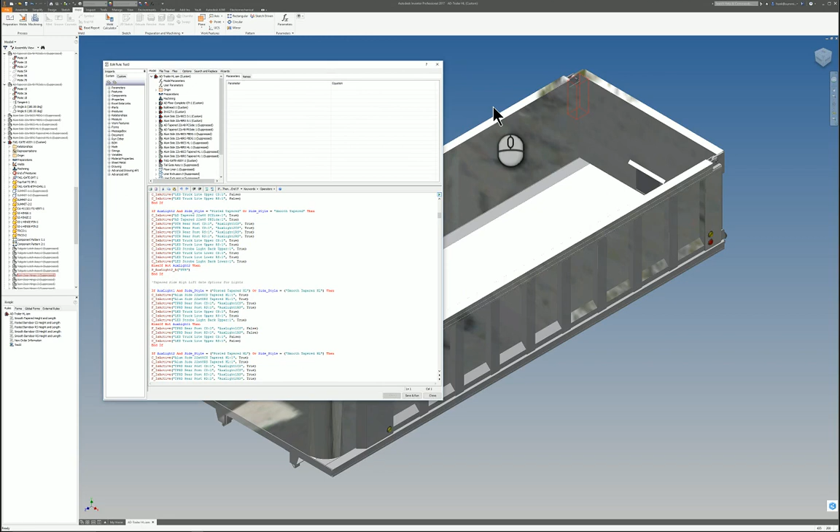Here we go. I've been fiddle farting around with this project for weeks now, and finally got some audio on these tracks, so there you go.

I've been getting some help from a friend of mine who I never met from Eastern Europe someplace. His name is Mike. Hey Mike, thanks for all the help. Can't tell you how much it means to me to have help with this.

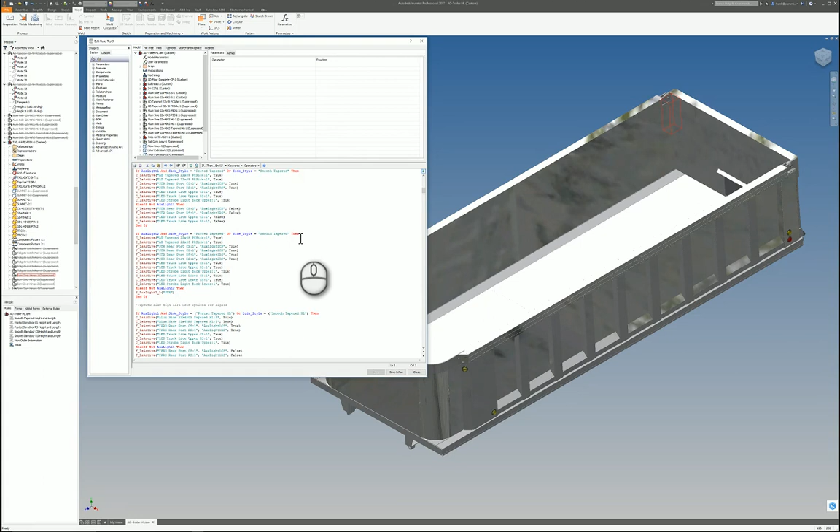Right now I'm fighting some issues with the rear lights, for whatever reason. I have them turned on in the sub-assemblies on the left, or the curbside and the roadside models. So, oh, and also the double knuckle chute, they call it a double knuckle because of the two knuckles, obviously.

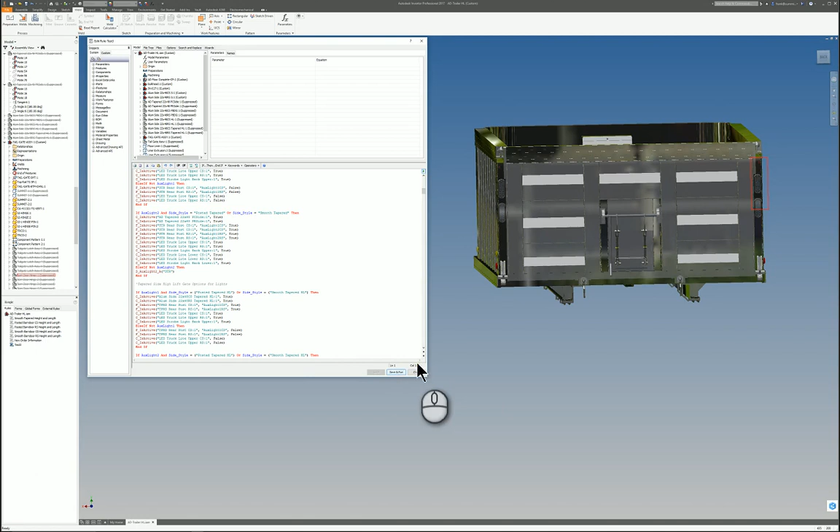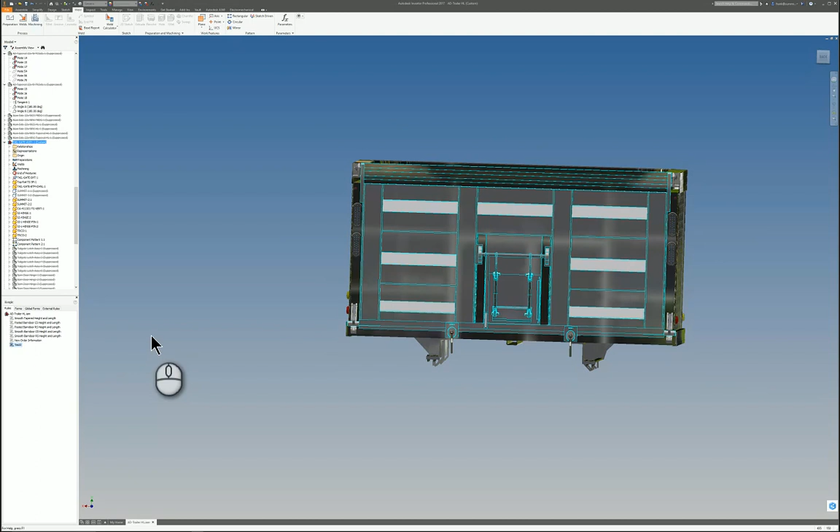So let's just save this, and this will fire up. Come on. There we go. Alright, and my form went away, so let's see if we can get it back. Didn't pop on another screen. Alright, let's do it this way. There we go. Save and run. Alright, got my form back.

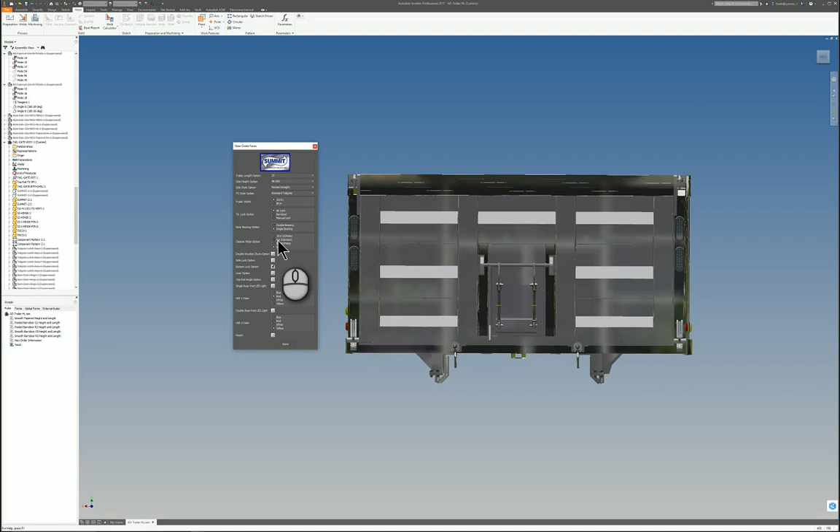And as you can see, clicking on the double knuckle chute does nothing. Everything else seems to work pretty good, with the exception of the lock options on the floor assembly. That's some code that needs to be straightened out. And the cleaner plate option is not working properly.

It worked when I had 5,000 lines of code, but with the pared down version I got from Mike, well, let's just say we're working on it for now. And I added blue to the mix just for the fun of it. And I get an error when I click on this. It's looking for the back of the lights. The lights are an assembly. And the back is the part that actually changes color.

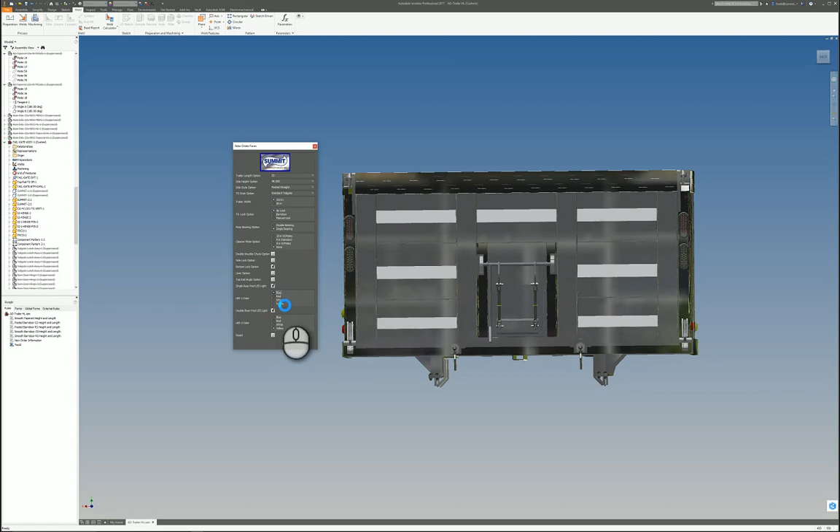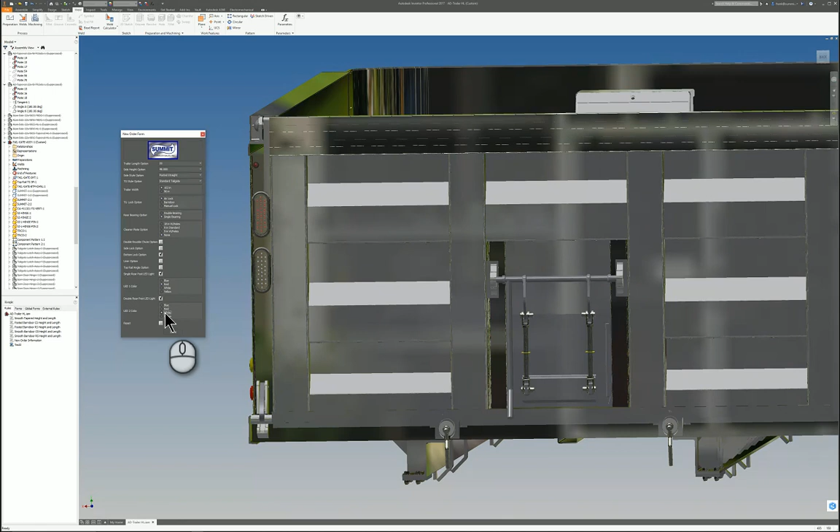So you can change them to blue, yellow. I don't know if you can see it on here real good. Let's get in on it a little bit. White. It's kind of hard to tell. So stock, if there is a dual light configuration, the tops are usually red, and then the bottoms are yellow or white. So the bottoms are either turn signals or backup lights or both. LEDs, you can have multiple colors in one light fixture.

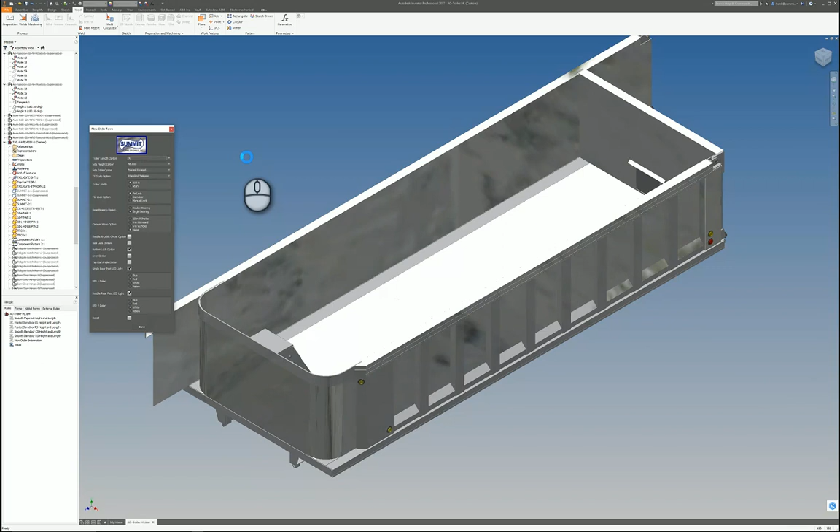So anyhow, let's just play with some of the other options that do work for now. Let's get that up there. Alright, now we can change the length. The length works great. I'm not going to go through all of them. It takes long, and these videos get hideously long when you try and go through all the options to make sure everything works. I've done that off video, and all the lengths work, all the heights work for the side heights. Let's just change it to 60 as a popular side height.

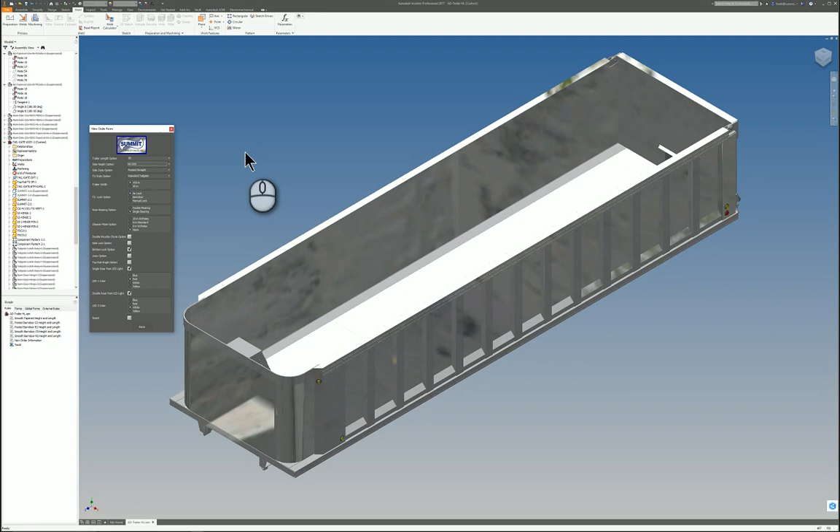There's all kinds of options with this, and the goal is to get this thing so it works with all the options, and then push it up to one of the Autodesk hosted sites. I think it's Configurator 360, and the model goes up there, the forms go up there, and your customers can order their configuration. Obviously from your form here they can select all the options they want.

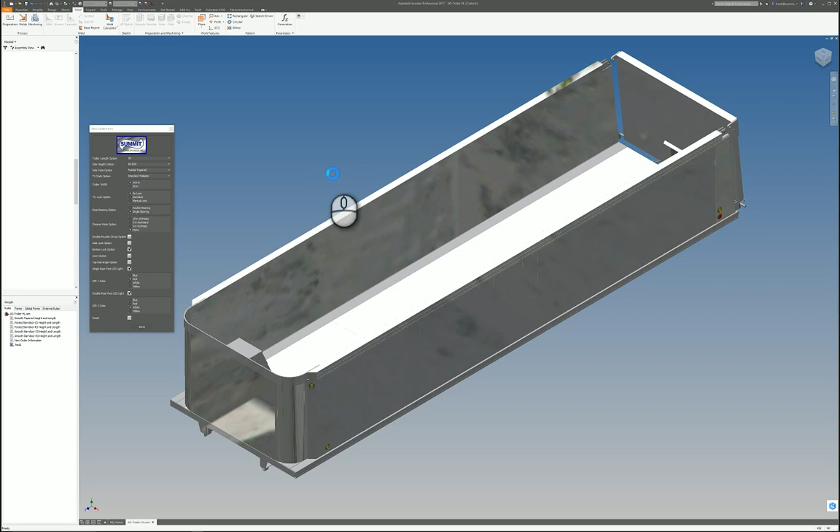And then let's change the side configuration. Let's go with posted tapered. And for whatever reason, this silly thing goes through a lot of the side options that I've gotten back. And to be fair to Mike, I just gave him the model files for all of this stuff yesterday, and so he hasn't had time to see what's actually going on. He's only been looking at the raw code and tweaking it from there, so I'm amazed at how much stuff works here.

Now you can see some of the constraints are off. I need to tweak some of the constraints on the gates, but I'll show you. This is a tapered side. Oh, come on. Okay, there's the tapered side, and obviously I need to get after the constraints on the tailgate, which that's not a big deal at this point.

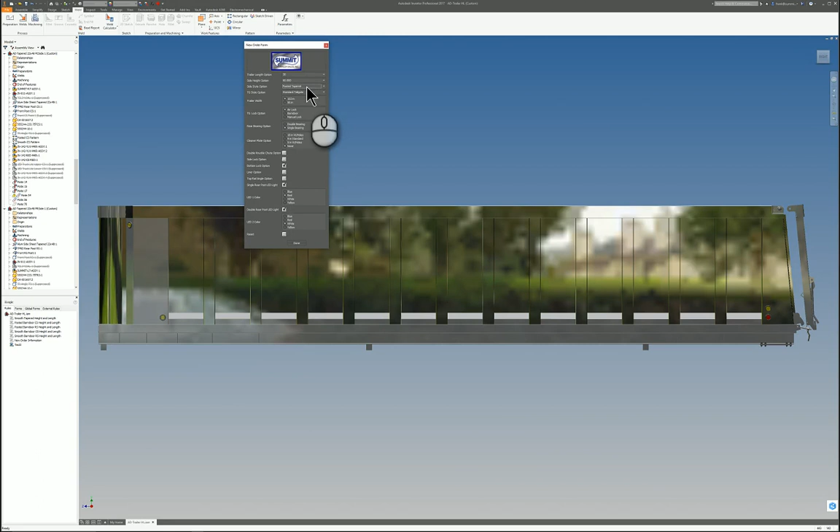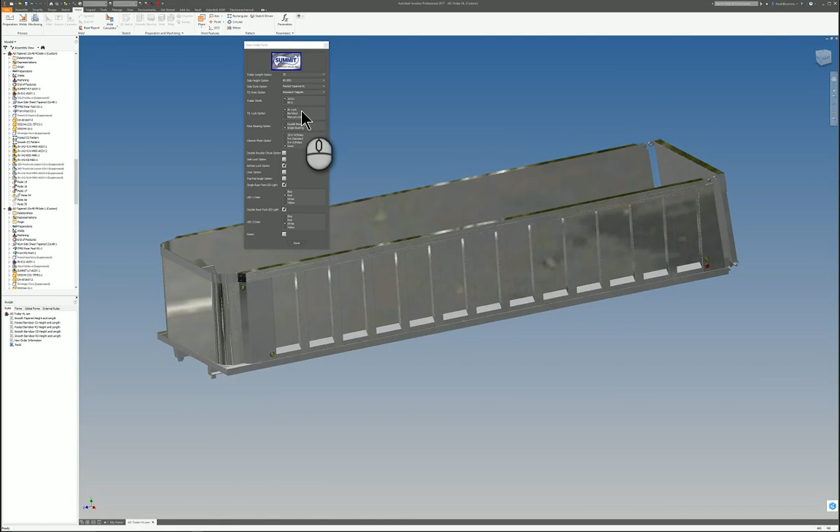Let's do something. Let's go with posted. No, I don't want to do that. Oh, it's going to give me an error on that one, so we're not going to do that one. I think I may have just junked the code. Alright, well, anyhow, you guys kind of get the idea what's going on here.

Still working on the reset. When I had the 5,000 plus lines of code version of this rule that's driving this whole model, the reset worked great.

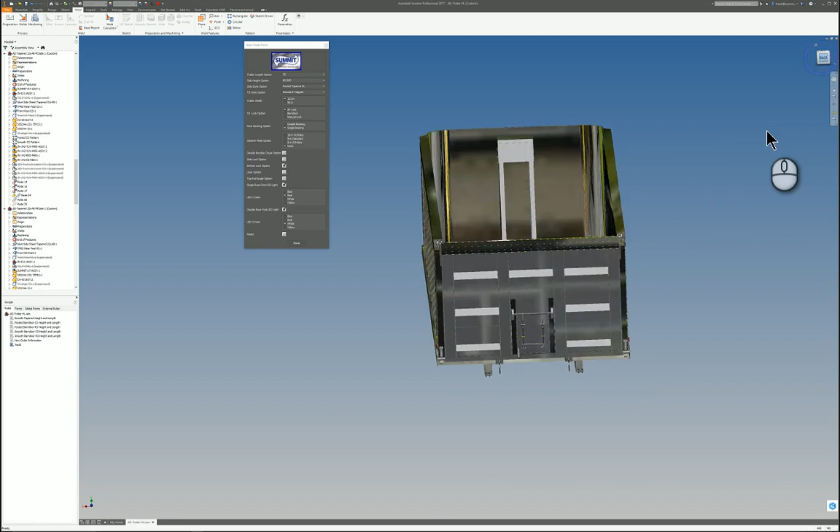Now that I'm using Mike's code, I have to put all that stuff back into it. Let's just see if these options will work. Now the lights went away too. That's no problem. Oh, that's what's throwing the error. See, it's looking for this, the back, which is the part that has the colors in it. So do that. I wonder if this will let me go to smooth side.

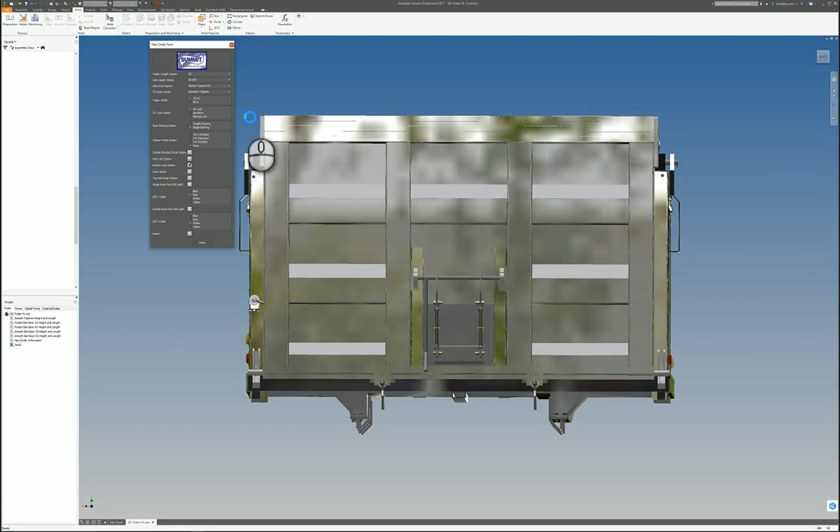Oh no, there's the high lift. Now the high lift is going to work. Maybe. Maybe not. We'll see. Anyhow, you guys kind of get the idea of what I'm trying to accomplish here. I don't know if this would be considered ambitious for iLogic programming. Oh, look at that. Let's see. Will it go together?

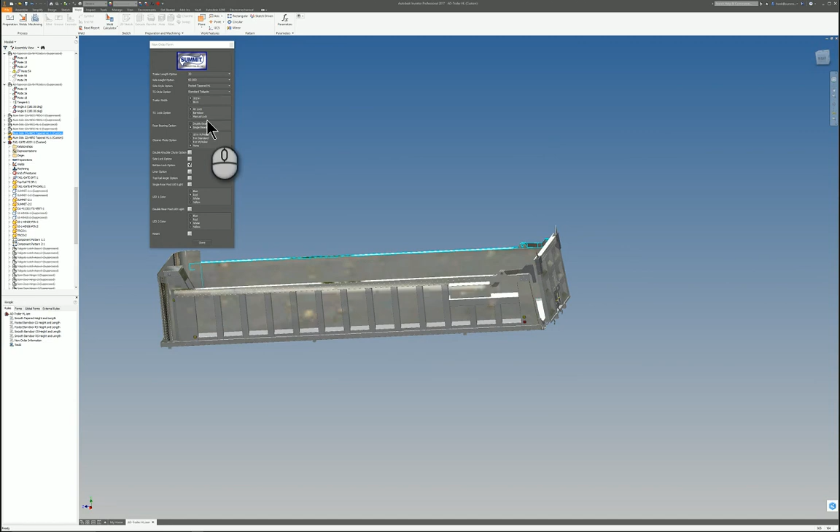Yeah, I'm not a fan of tapered sides. I don't know why the customers order them, but we aim to please. So let's go with a smooth straight. There. And we'll do that option, and then I'll wrap this video up. I'm sure by now you guys have gotten the idea what I'm trying to do here.

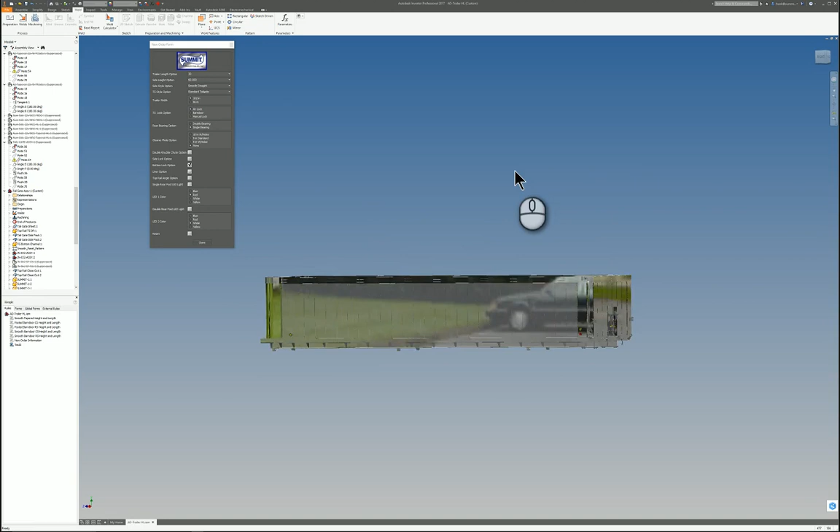And at this point, this isn't really a tutorial. This is just showing you what this can do. I'm not getting into any of the coding or anything like that, just driving the model, showing you what's possible. Ooh, see, now it's gone through all the other iterations before it settles down on what I've selected.

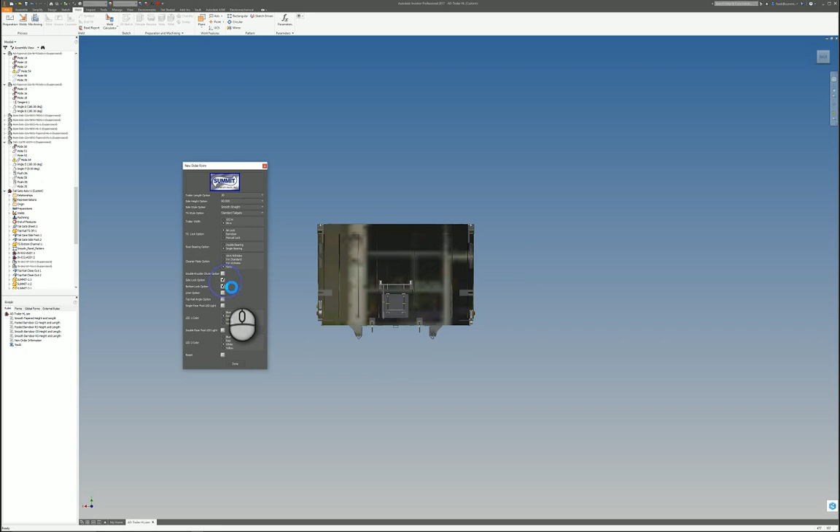So I'll change the trailer width from 102 to 96, and let's go with the side lock. You'll see those pop in there, and it goes through all the tailgate options again. I don't know why it's doing that.

Mike, we have some work to do. Just kidding, this is my project, not yours.

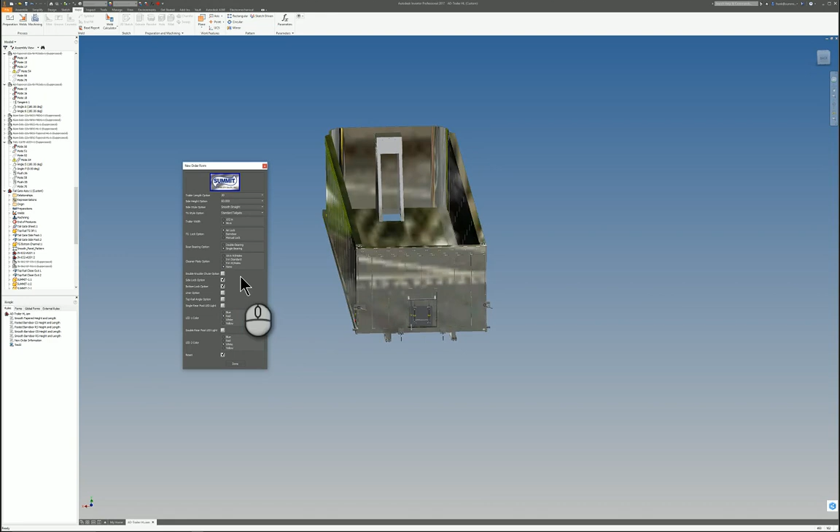Alright, now I don't know why that tailgate stayed at 102 again. I thought I had all that sorted out, but alright, one more thing that's kind of cool, and I'll let you guys go. Liners. This is an option that some customers order. It helps the load to exit the trailer better.

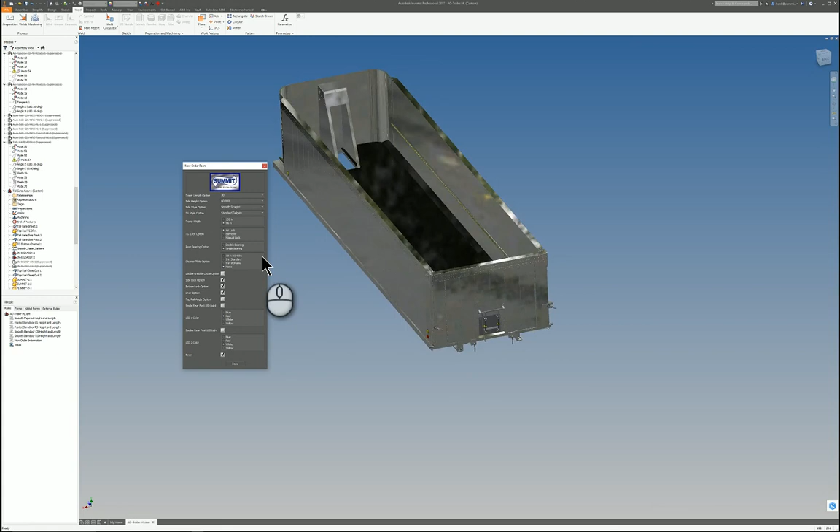It's very similar material to the guides on your snowmobile that help reduce friction. Same material, but the stuff we put in our trailers is typically black, and it doesn't really make sense to offer color options there. So it's for fun. Let's just try the reset thing and see what happens.

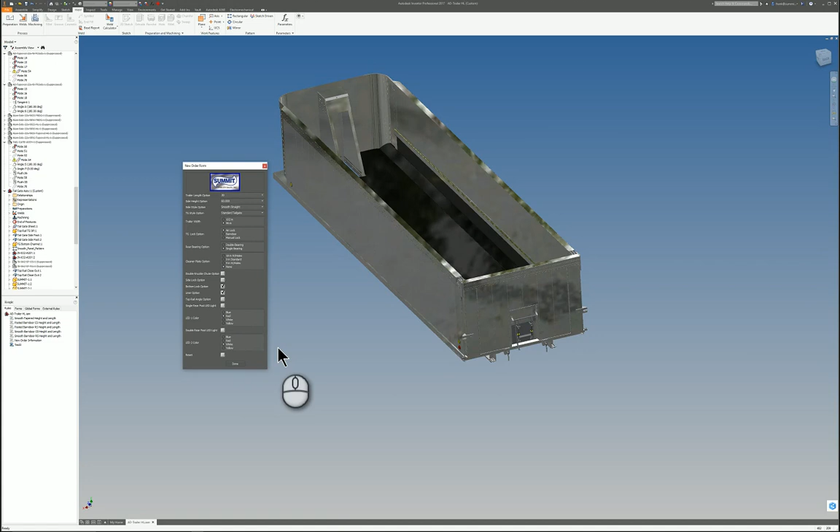It's probably gonna puke, but or not. Nah. Yep, it puked. Give it another quick try here.

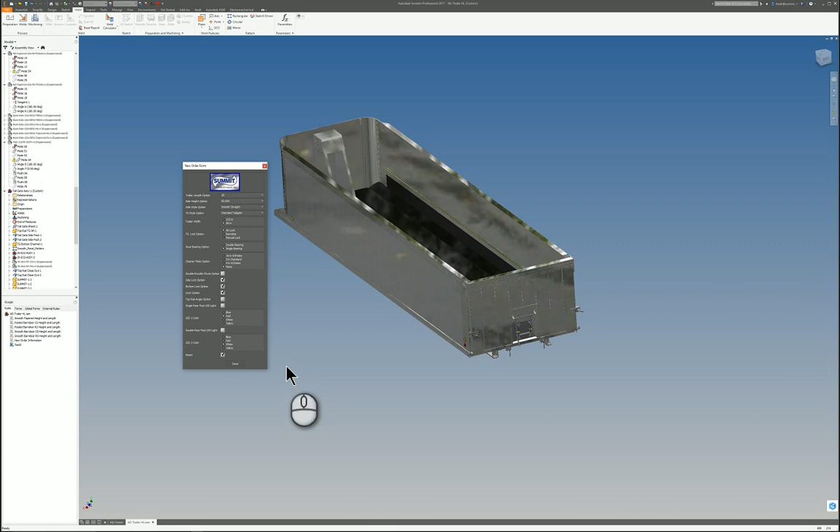Also working on doing a PIP thing in the screen with my webcam. The thing I really don't like about this is it's done with Screencast, which is Autodesk's product, which makes sense because it works with all their products. But I want to get something that's a little better grade. I got a 4K monitor here, and the Screencast software only allows 720, which is kind of disappointing. I don't know how this is going to turn up on YouTube. I guess I'll see it when I post it up there.